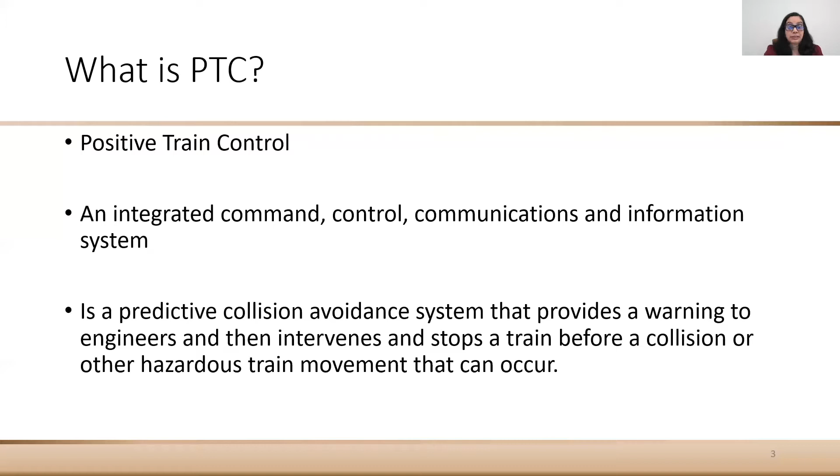which helps to give a warning to the engineers if there is going to be a collision or a hazardous movement that the train is going to make further. So this system helps to give the engineers a warning and helps to predict the collision and the hazardous movement that might occur. Let's see the need for PTC technology.

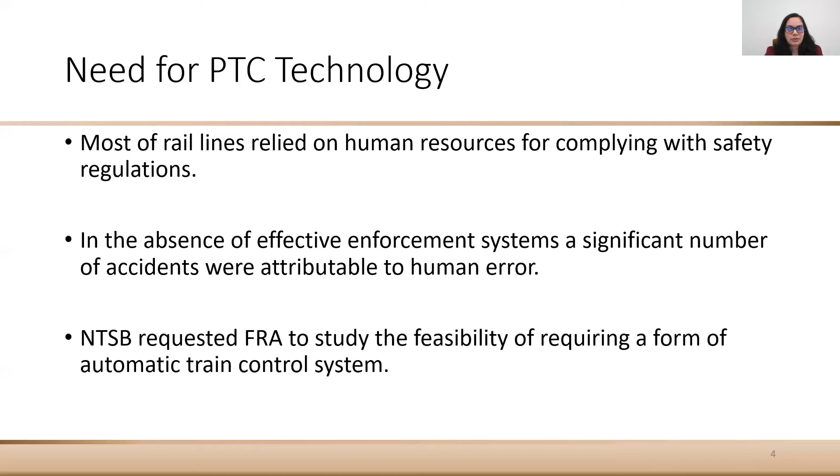Most of the rail lines rely on human resources, either for the operations or the safety regulations that the rail line should follow. Because of the absence of any safety regulated enforcement system, that led to many human errors and accidents that occurred. So the National Transportation Safety Board requested FRA to do a feasibility study on automatic train control system. And then the PTC timeline has been developed.

So let's see the overall timeline of PTC development. So in 1994, the PTC term itself has been introduced to FRA, in a report to the Congress. And in 1996, the FRA Railroad Safety Advisory Committee created a working group to derive all the safety objectives that need to be considered.

So in 1999, for the implementation of positive train control systems, RSAC, which is Railroad Safety Advisory Committee, published a report on how the government and the railroad industry would facilitate PTC development. They derived a report which gives all the details of PTC development.

So then in 2004, FRA initiated a study which determines the cost and the safety benefits of PTC, and the estimation will exceed around 2.3 billion to implement this system over 100,000 miles of track.

So all the details of this data have been published in the link provided here, which I'll be sharing with you as well, so that everything provided in this document is publicly available and you'll have an idea. So this is the amount which they published in 2004. So now let's move on.

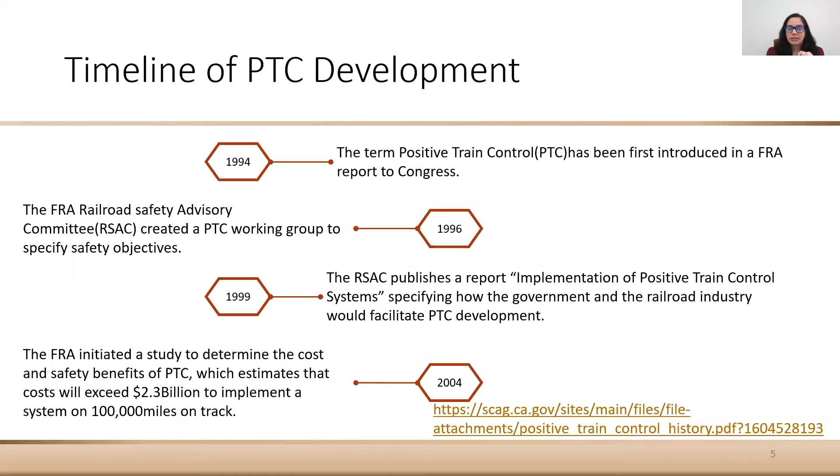After 2004, in 2005, FRA publishes a final rule on the functional requirements needed for achieving PTC. Whatever the system could be, PTC technology would be neutral to the system. So the PTC technology is going to be neutral for any system it is going to be implemented on. So that is what they derived in 2005.

So then in 2008, in response to several fatal rail accidents that occurred between 2002 and 2008, the Rail Safety Improvement Act, which is RSIA, was signed into law. And then in 2010, the final rule for PTC implementation is issued by FRA, and it requires interoperability. We'll look into interoperability later. For most of the freight and passenger rail carriers, by December 31st, 2015, the implementation of PTC needs to be done, and it should be interoperable.

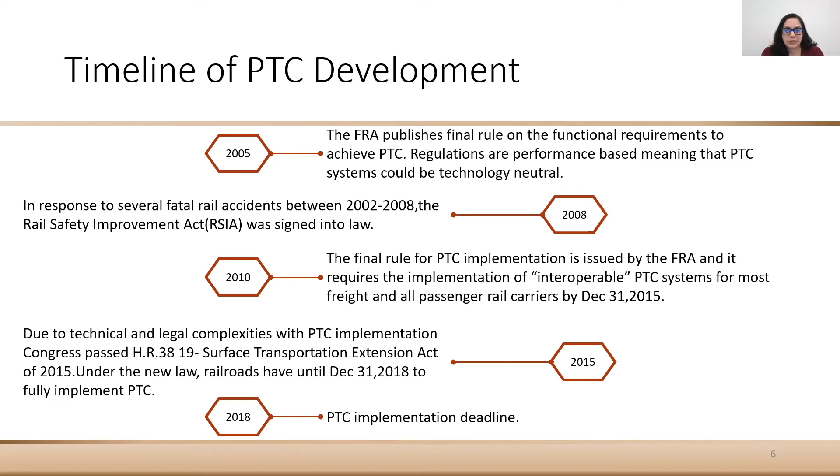Due to technical and legal complexities with PTC implementation, Congress passed HR 3819, Surface Transportation Extension Act of 2015. Under this law, the railroads got an extension to December 31st, 2018 to implement the whole PTC. Before it was 2015, and now they extended it up to 2018. And so 2018 is the implementation deadline, as you could see. So now let's see what the Rail Safety Improvement Act is.

PTC refers to communication-based or processor-based train control technology, which needs to prevent train-to-train collisions, over-speed derailments, or any incursions into established work zone limits. And if the switch is in the opposite position, the movement of the train needs to be stopped.

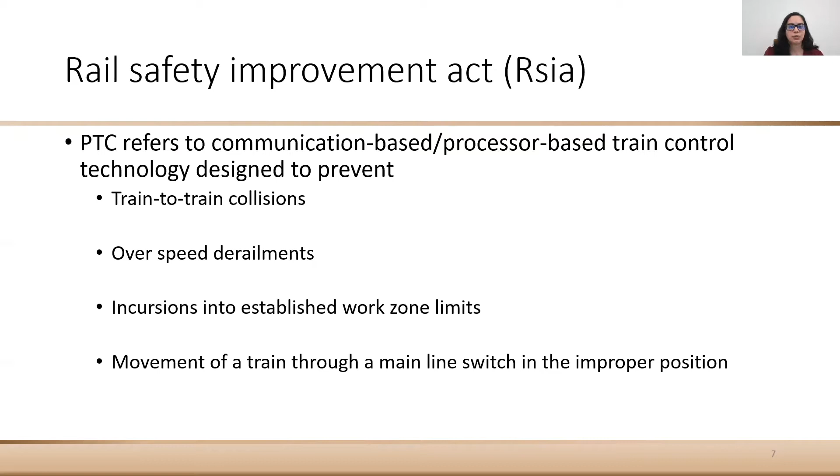Basically the PTC itself needs to prevent train-to-train collisions, speed derailments, and incursions if there is a work zone area, and it should prevent the movement of the train if the switch is on the wrong side. So PTC needs to prevent all these. That's what the Rail Safety Improvement Act rule says. So what does PTC prevent? Again, we are deriving the same thing.

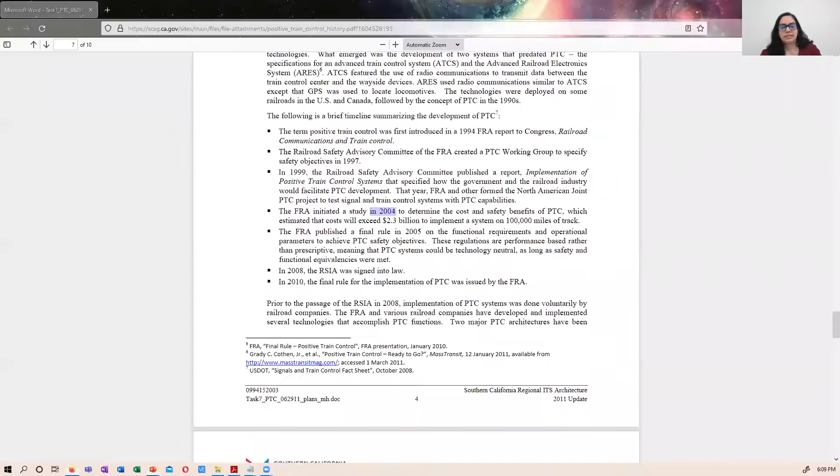What does PTC do? It helps to prevent all the 4 listed items, which are train-to-train collisions, over-speed derailment, incursions into any work zone area, and movement of the train if the switch is in the wrong position. This is directly available in the PTC system information on the railroads government site. So as you could see, this is the overview of PTC system information. So this is what the PTC system should prevent.

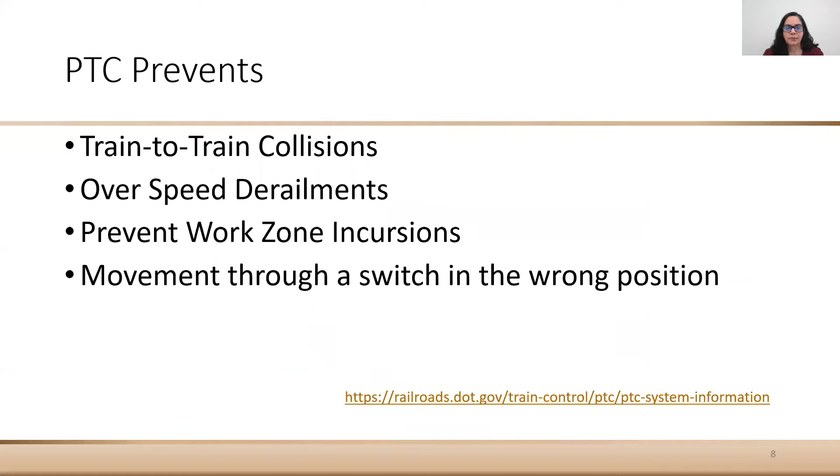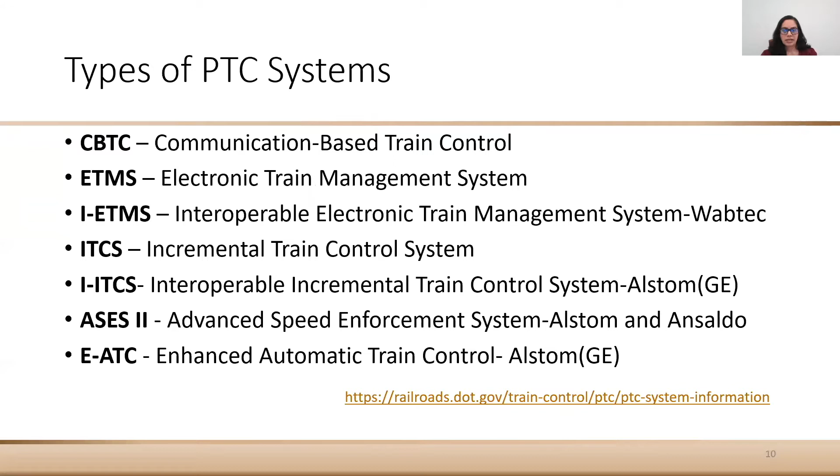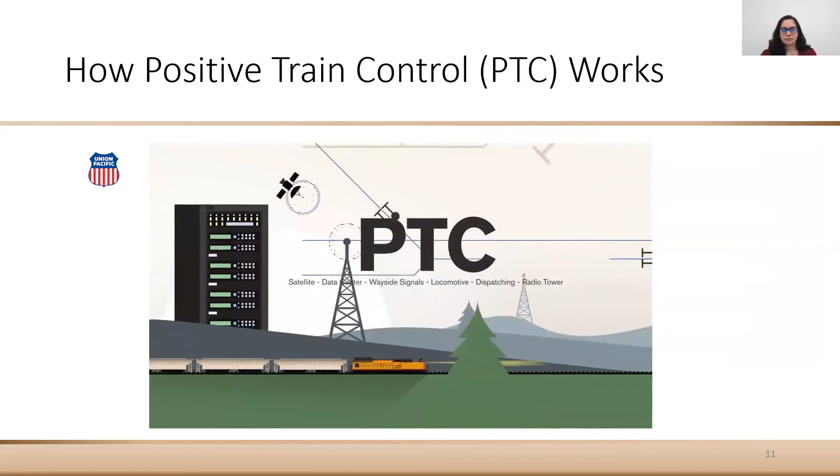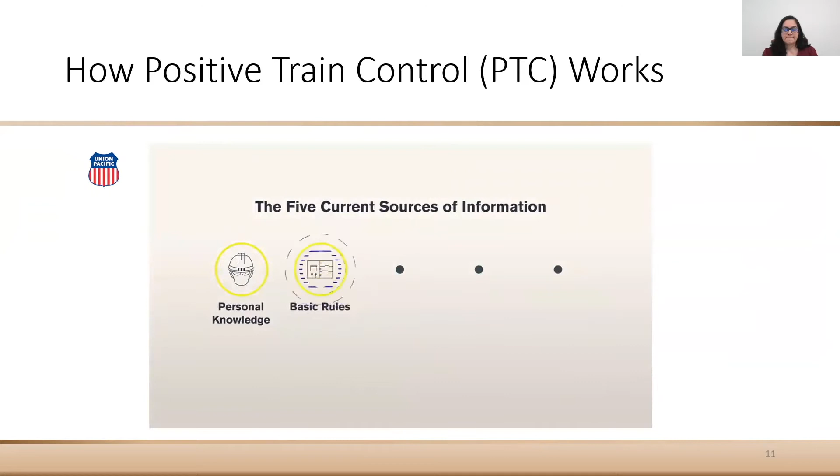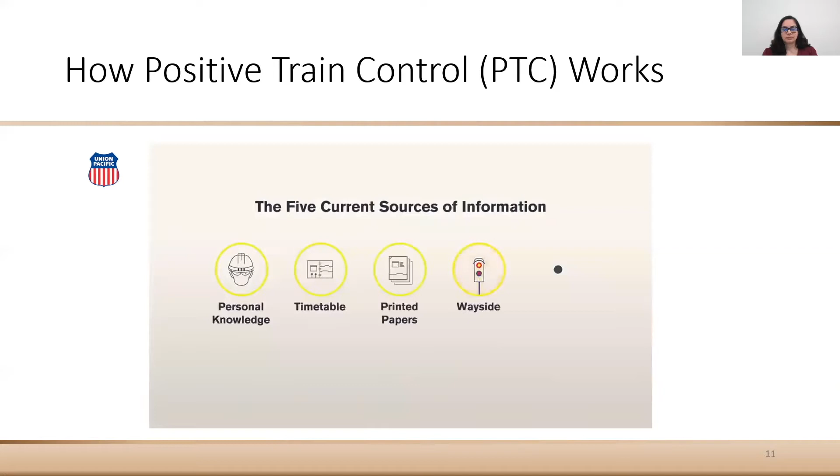So how does PTC work? So let's see how PTC works now. Positive Train Control, or PTC, is changing the way railroads operate. Today, Union Pacific engineers and conductors have 5 sources of information: personal knowledge of the territory they regularly work in, basic rules such as speed limits found in a timetable, additional printed directions called track bulletins, wayside signals or lights that indicate whether it's safe to proceed, and voice communication from a dispatcher who may be providing additional instructions.

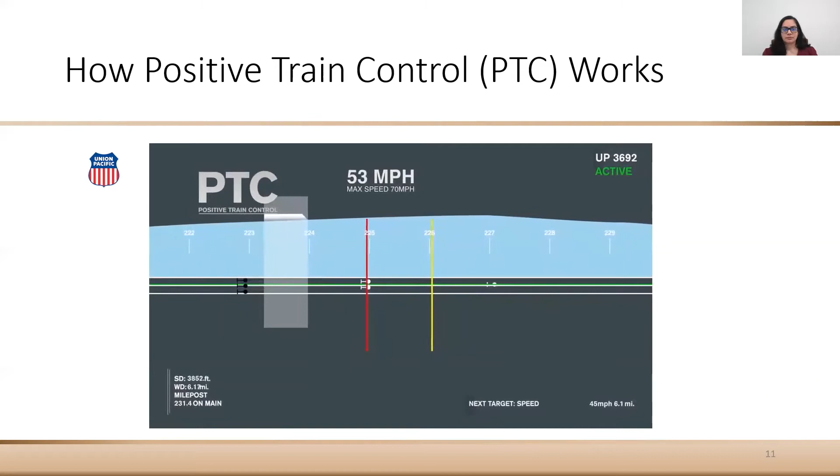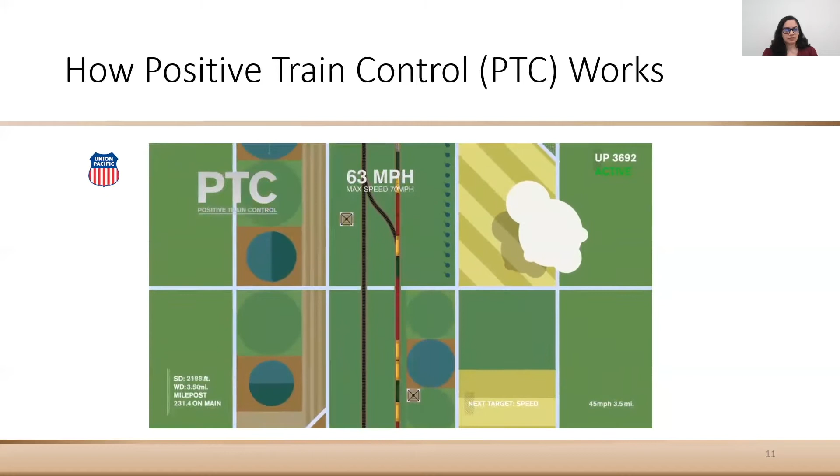PTC integrates these 5 sources of information into one single computer-based system. The PTC locomotive computer communicates with various wayside devices and Union Pacific's Harriman Dispatching Center, connected by more than 800 radio towers installed throughout Union Pacific's network. The geographical characteristics of the railroad, information found in a timetable, track bulletins, and most dispatching communications will now be loaded into a database.

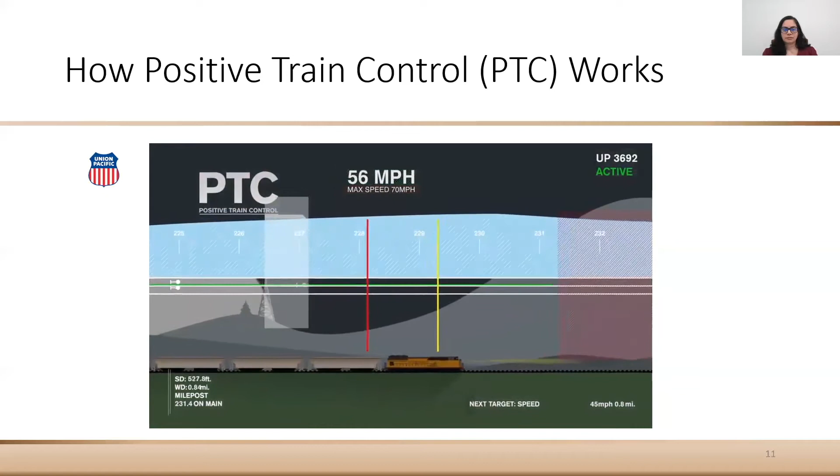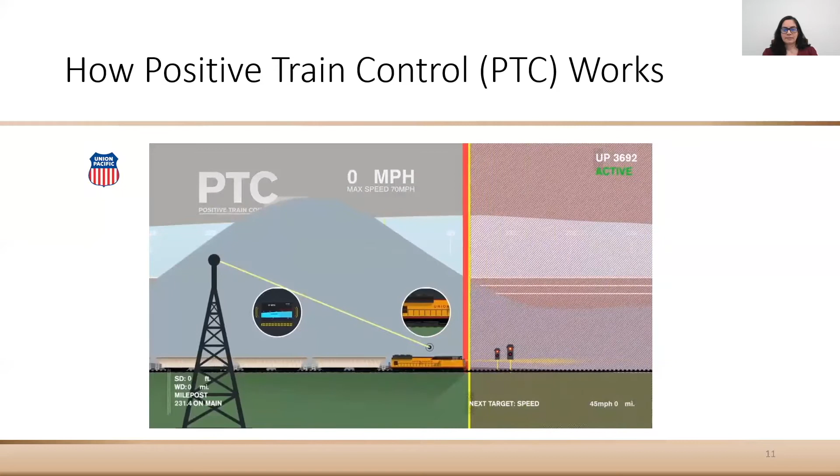Things like the physical layout of tracks and current speed limits update in real time on the engineer's PTC display. If the engineer does not react to instructions in a timely manner, PTC fully engages the locomotive's brakes, stopping the train before an accident can occur. PTC reduces the possibility for human error-caused incidents, creating an extra layer of safety for Union Pacific railroaders and the communities we serve. So that is how PTC works, and let's see what is interoperability and PTC principles of interoperability.

Interoperability is nothing but how well one system is communicating with the other one. So the host railroad has one system and the tenant railroad has one system. How do they both talk to each other? So how is the locomotive able to control the host railroad and the tenant railroad? How well they communicate with each other, and how does the PTC system respond, including any kind of uninterrupted movements? Because of these two different systems, there shouldn't be any effect on the movement or any kind of effect at the boundary. So that is how interoperability plays a major role here.

So let's see the interoperability. What does interoperability say? So it is the ability to control locomotives of the host railroad and the tenant railroad to communicate with and respond to the PTC systems, including uninterrupted movements over property boundaries. So that is what interoperability is. How can we achieve this is by providing data using ITC protocols between back office server, communication-based systems, and the wayside equipment. So how well the ITC messages are being transmitted between different zones. So that is where the constant communication helps a lot.

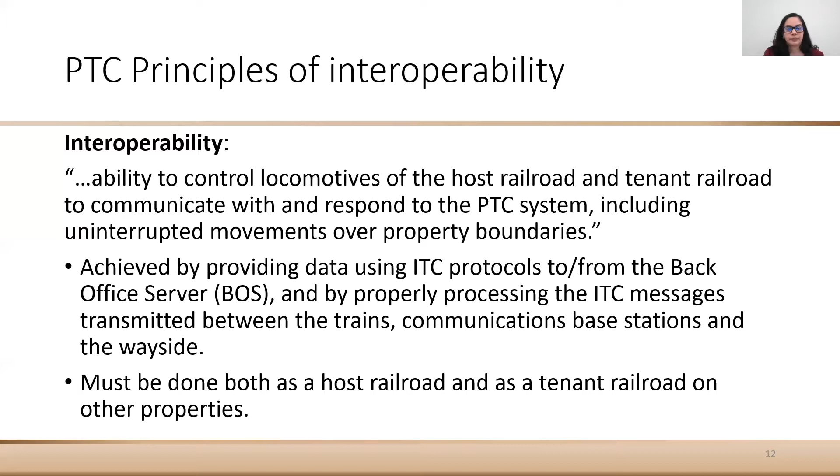So let's see what interoperable electronic train management system is. I-ETMS integrates new technology with existing train control and operating systems, which helps to enhance the train operation and safety. And it reduces the potential train accidents, and it helps to prevent track authority violations, speed limit violations, unauthorized entry into work zones, and the train movement when the switch is in the wrong position. All these can be prevented, and crew remains in control of the train with I-ETMS. Its system monitors and ensures crew's compliance with all operating instructions. Any operating instructions, the system monitors if the crew is in compliance or not.

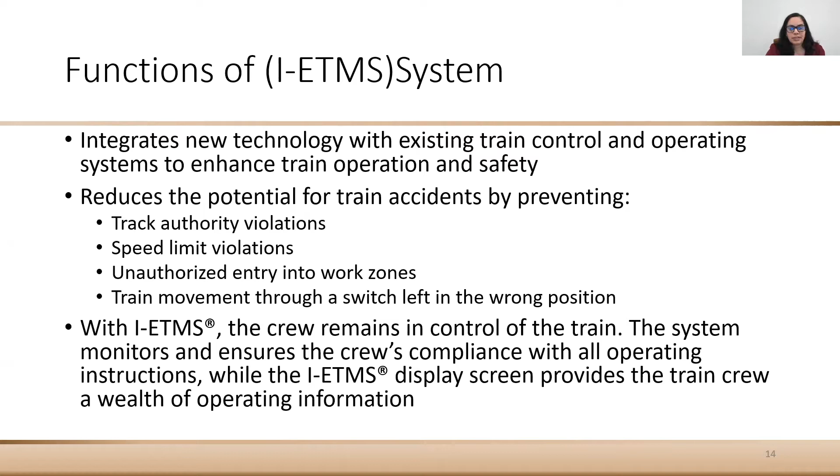So the I-ETMS has a display screen where it provides the train crew great information that the train crew requires. I-ETMS helps the crew to stay in compliance through the display screen. Means all the information can be displayed in there. So what are the functions of I-ETMS? So as the train moves down the track, through the geographical database and the global positioning system, the train's position can be achieved, and the warning and the braking curves according to the speed limits, and then the train and track information, location, movement authority, speed restrictions, and the work zones, and any kind of restrictions, all can be achieved on the onboard computer.

So everything can be displayed. So I-ETMS also communicates with wayside devices, checking for broken rail or any kind of switch alignment, if it is proper or not, and any kind of signal aspects that are changed. So everything can be communicated well via I-ETMS. And it is real-time analyzed data that could be provided, which improves train protection through a safety net.

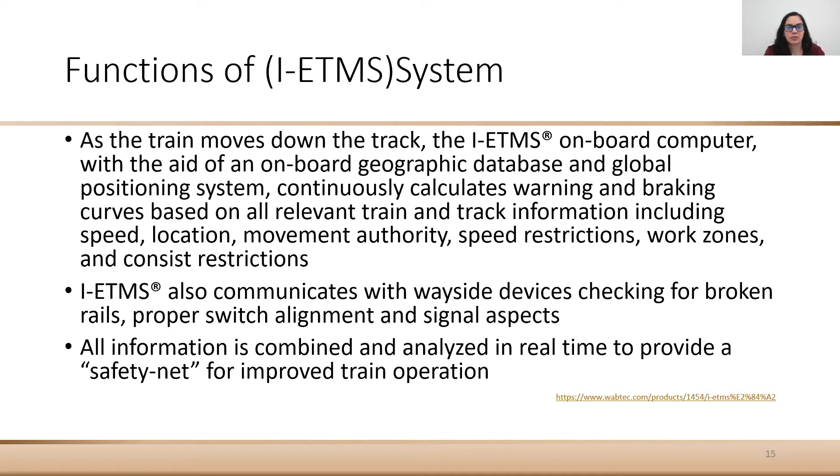So this is a Wabtec system. You can go and view for more details if you are interested. So this is I-ETMS we talked about. And let's see the positive train control system in the asset management portfolio of Wabtec.

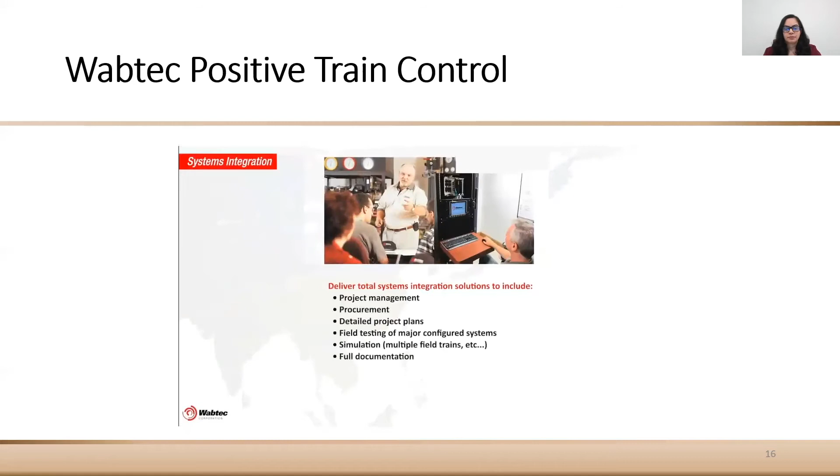So that's Wabtec's positive train control asset management portfolio. So let's see the PTC system segments now. All the components are integrated into a single system, which is divided into four segments: office segment, wayside segment, communication segment, and onboard segment. So the PTC technical overview consists of office segment, just like we discussed, wayside segment, onboard segment, and then the communication segment.

As you could see, computer-aided dispatch communicates with the back office server, which is in line with the communication segment through radio, providing a communication link between office and the equipment, and the data link radio is in contact with both the trackside and the back office server, which transmits the data and the track status, the signal aspect and the switch position, which are in the wayside segment, through the communication segment to the back office server. This is how everything is interconnected.

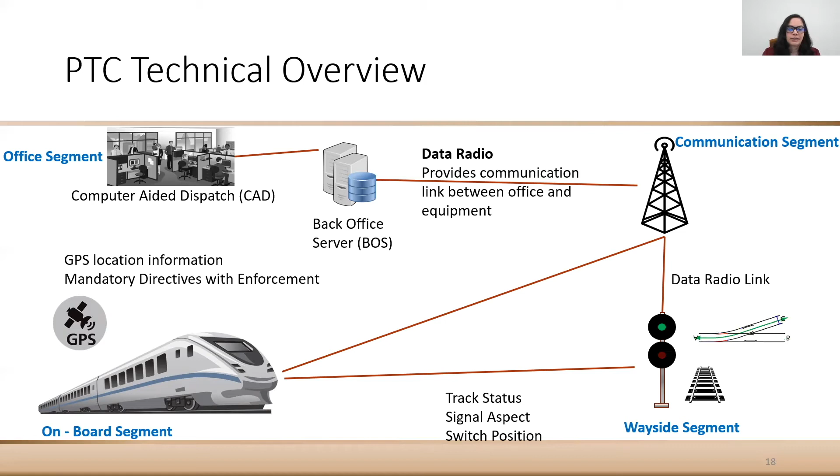So the information from the back office server would be directly communicated to the onboard segment through all the respective interfaces. The onboard segment sends status and reports information to the back office server. Both of them would be in line. So that is how the office segment works.

And the office segment has the interoperable train communication message server. It resides in the back office. It contains a server which is interoperable and is in the back office. Whatever system or train is on the property needs to be well communicated with the existing system, and it should be interoperable.

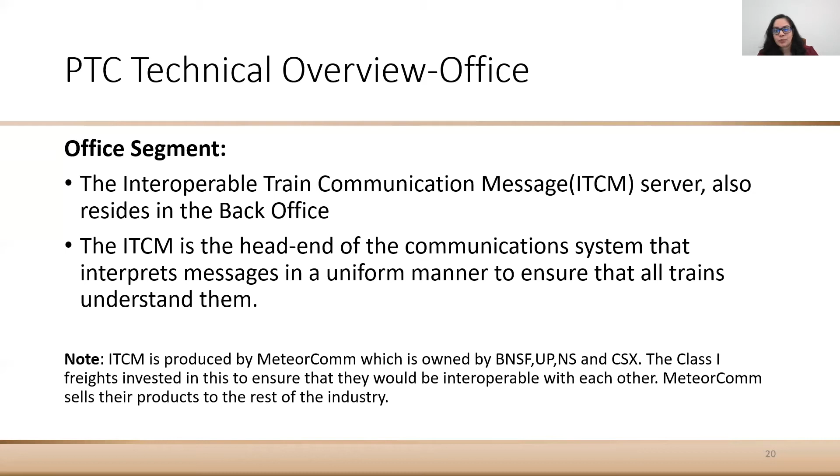So this ITCM, which is a train communication messaging server, ensures that all the trains understand them, and it is produced by MeteorComm, which is owned by BNSF, UP, NS, and CSX, a communication system for all the trains so that they could understand them. The Class 1 freights invested to ensure that they are interoperable with each other. It is a product owned by MeteorComm. Now we are talking about the wayside segment.

The wayside signal system is the underlying safety baseline for the PTC overlay. It reports the switch position, signal indications, and the status of the monitored devices. Everything would be reported and transmitted to the onboard and back office segments. And the train communication would be through 220 megahertz radio, which is the primary path for wayside to train communications. PTC 220 megahertz is the radio communication system that they'll be using.

The communication could be peer-to-peer or wayside to train, radio to radio. Peer-to-peer is nothing but wayside to train or radio to radio. It could communicate either way, and the communication would be relayed to the back office and transmitted through a base station via the wayside status relay service. That is how they communicate.

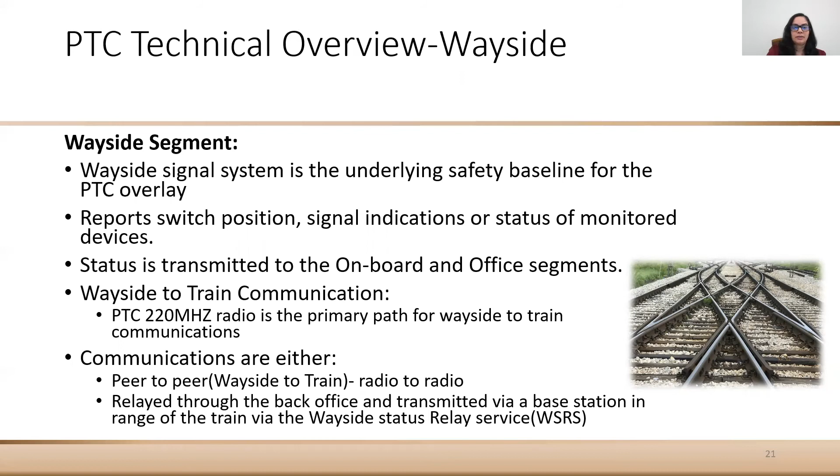So communications, as we discussed before, is 220 megahertz network communications, and how they'll be communicating is through the ITC messaging system or ITCSM, which is ITC systems management. So 220 megahertz radio is designed for this specific application, and it consists of the ITC messaging system. The main components of the ITC messaging pathway are back office and application gateway, ITC messaging application gateway, and ITCSM gateway assets such as 220 megahertz ITC radio.

So 220 megahertz, again, is produced by MeteorComm, which is owned by the Class 1s, a radio specific for PTC. So let's see the details of MeteorComm here. I do have the link. So this is interoperable train control messaging.

Interoperable train control systems management. So this is how all the assets will be configured from the back office. This is how all the data would be transmitted to the back office.

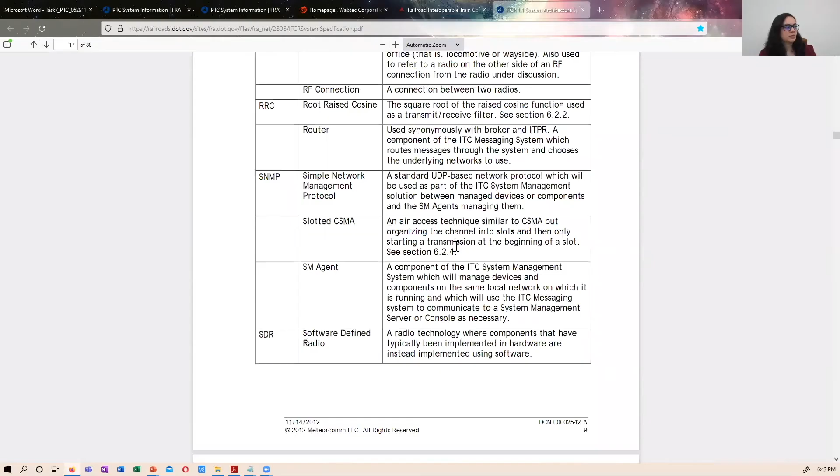So let's move on. The communication segment between the back office, onboard, and wayside totally relies on a bidirectional and redundant communications network. Obviously, it should be bidirectional and resilient. PTC projects include 5 components: base station radios, onboard radios, wayside radios, backhaul network, and network management system. All the data is provided here. You could go through the link if you are interested.

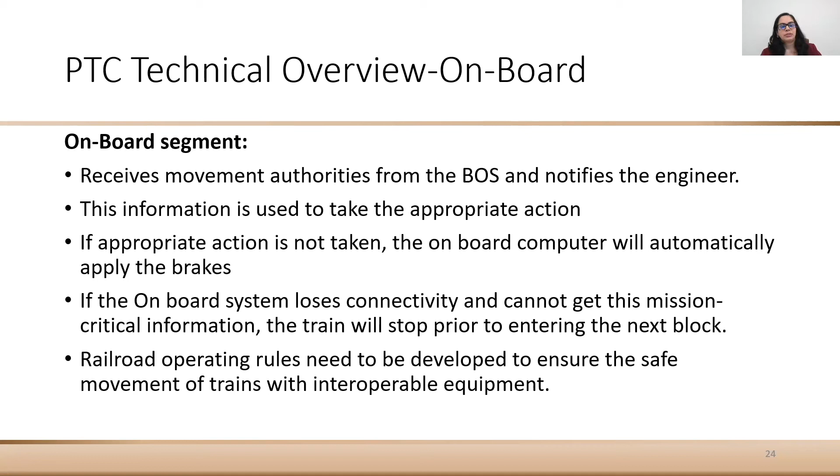If the onboard system loses any kind of connectivity, then obviously the information which needs to reach the onboard driver would not be received. So the train would stop automatically before entering the next block. That is how it works in the onboard segment. These operating rules are developed to ensure the safe movement of the train, which is interoperable again.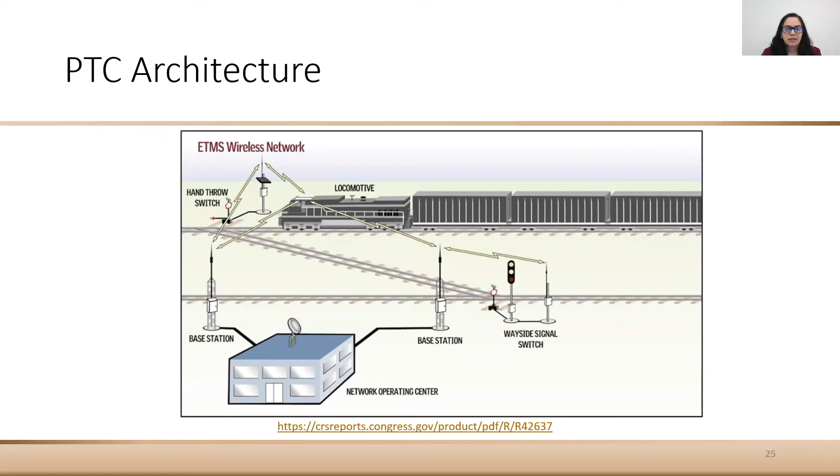So this is the architecture. This was submitted to the government, congress.gov, if you see. So this is how it looks. As you could see, the ETMS wireless network is communicating between the locomotive and the wayside, and the nearby base stations and the wayside equipment are communicating with the network operating center, which is nearby. This is how the whole architecture is.

PTC implementation could be of 3 types: vital standalone, vital overlay, or non-vital overlay. As a vital standalone, PTC replaces all the conventional existing systems, integrates all the train control functions and gets everything into one system. Currently, PTC projects follow either non-vital or vital overlay. There is no standalone PTC technology as of now. So it could be vital or non-vital, and it integrates with the existing CTC system into one system.

So if it is a vital overlay PTC implementation, trains are governed by PTC while the block and interlocking functions are provided by conventional CTC. So trains are governed by PTC while the block system and the interlocking functions would be the conventional CTC method.

When PTC is used as a non-vital overlay, trains are still governed by conventional systems, signal indications, and/or verbal authorities. PTC just acts as a safety overlay in the background. It is kind of an indication system if it is a non-vital overlay. So that is the implementation part of PTC.

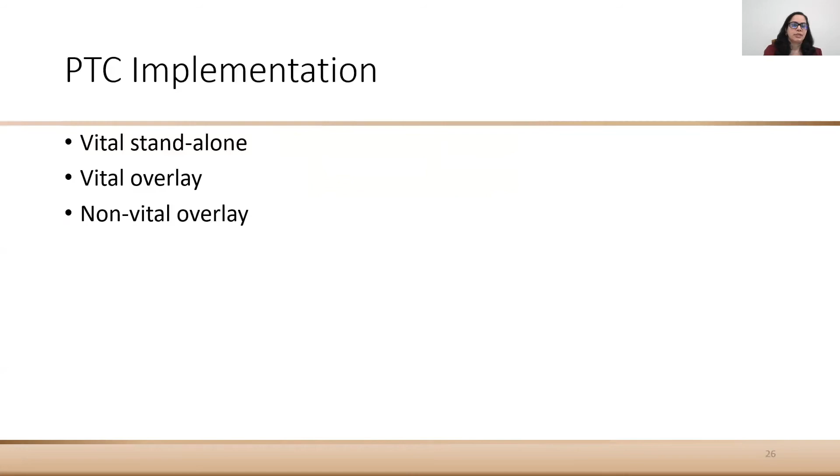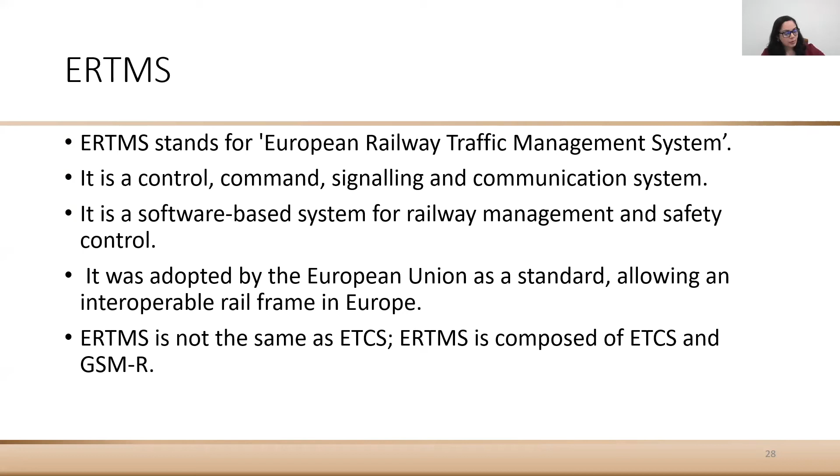Now we'll go into ERTMS and see what it is. ERTMS is the European Railway Traffic Management System. It is a control, command, signaling, and communication system, a software-based system for railway management and safety control. As everybody knows, it is a European system, and it is a standard interoperable system in use. It is a combination of ETCS and GSM-R. GSM-R is the global system for mobile communications for railways. We'll go into detail now.

ERTMS and its components. ERTMS is a combination of ETCS and GSM-R. ETCS is the European Train Control System. It is an automatic train protection system that continuously ensures the train is in line with the safe speed and distance, and it provides relevant information to those who need it, like the driver and the onboard equipment. It is going to replace the national ATP systems.

GSM-R is a mobile communication system with a specific frequency that helps with voice and data communication between the track and the train. It is based on standard GSM, but uses specific frequencies reserved for rail applications.

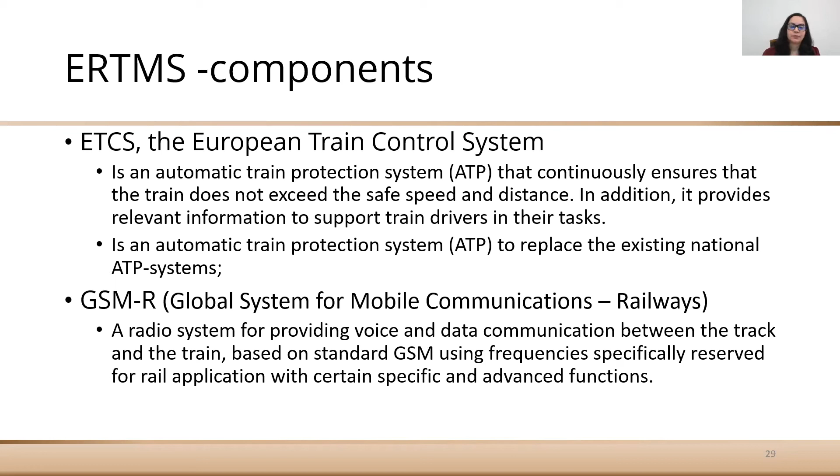So what are the levels of ERTMS? ERTMS levels 1, 2, 3. Let's see what level 1 is. It has Eurobalises without infill, an overlay to the existing signaling system, and movement authorities through Eurobalises. Train integrity and position are determined by track circuit.

So that is how the communication would be. Train integrity and position come through the track circuit, but the movement authority information comes through the Eurobalises, and it is an overlay to the existing signaling system. If it is Eurobalises plus infill, Euroloop radio or extra balises, then again it is an overlay to the existing signaling system, with movement authorities through Eurobalises and train integrity and position by track circuit.

That would be through Euroloop radio or Eurobalises. That is how it has two sections. It could be via that, or it could be via infill.

So what is ERTMS level 2? Eurobalises plus Euroradio GSM-R, and radio block center. No more track side signals required. The data would already be received, so the movement authority and track description come completely over the radio. Therefore my cab display is always up to date and I need no line side signals. Movement authorities through GSMR and train position via Eurobalises. Train position would be derived through Eurobalises, and movement authorities communication would be through GSMR. That is how level 2 works.

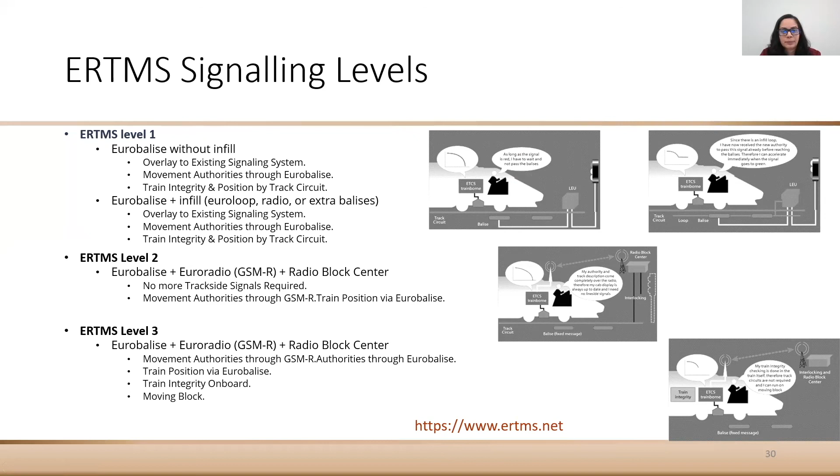The driver doesn't require any information from wayside signals because all the onboard equipment has got its information already. The data is up to date, so I don't need any line side signals - that is what the driver says. That is what level 2 configuration means: it doesn't require any wayside signal and signaling information.

What are the benefits of ERTMS? It gives us great interoperability and cross-border operations, and helps to supervise every train according to optimum characteristics. High line speed and shorter headways between high-speed trains. Increased line capacity, greater safety and efficiency for passengers, improved revenue earning potential for operators, lower maintenance and life cycle costs. So the maintenance would be very low and the cost would be very less.

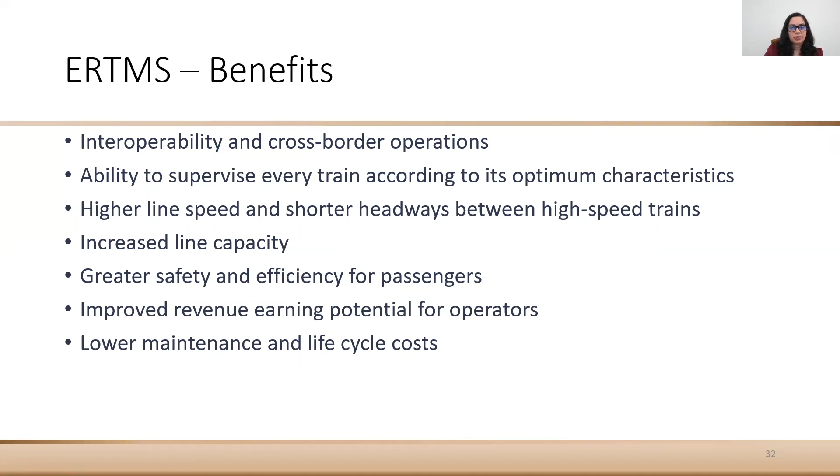Let's see some mainline solutions. Interflo is a product of Bombardier, with around 6 products. Interflo 250, 450, and 550 are ERTMS mainline solutions for levels 1, 2, and 3, used for secondary and regional lines, high speed, and commuter lines.

Interflo 150 is dedicated for industrial and mining lines. Interflo 100 is suitable for depots and stabling yards. For busy networks, they go for Interflo 200 - a conventional rail control solution for main lines for busy networks where headways are reduced, and still the highest safety integrity level is required.

If we consider Interflo 550, it uses GPRS, LTE, Tetra, level 3. They use a private mobile network for 550. So yeah, these are the ERTMS mainline solutions.

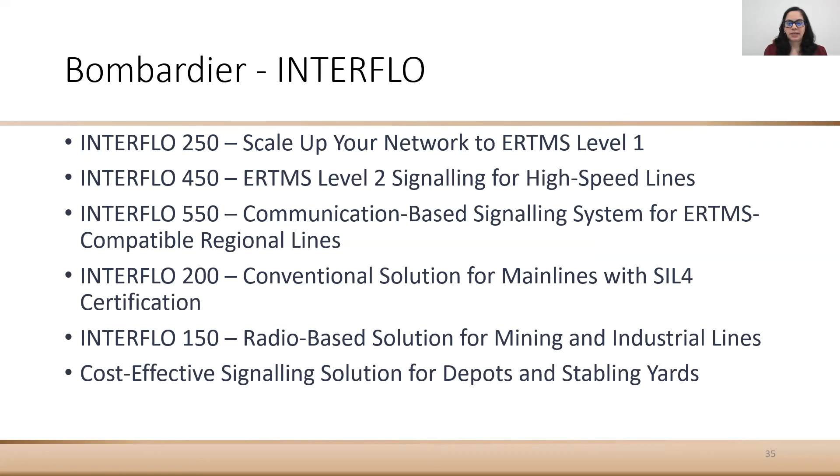Since we are talking about ERTMS, I wanted to show some mainline solutions: 250, 450, 550 used for high speed, commuter, secondary and regional lines; 200 for busy networks where headways could be reduced; 100 for stabling yards; and 150 is a radio based solution for industrial and mining lines.